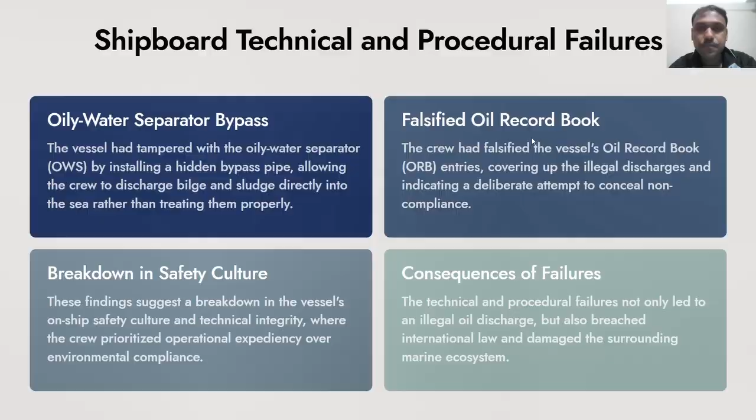The second key issue relates to port side infrastructure constraints. Chittagong Port has extremely limited capacity to handle ship-generated oily waste, with only a single oily waste reception barge capable of serving 1 to 2 ships per day. This is clearly insufficient given the volume of traffic and typical daily bilge production of tankers.

As a result, compliant vessels face long waiting times, congestion, and operational delays. This shortage creates perverse incentives where ships may view illegal discharge as less costly than waiting for proper disposal. In the Eastern Glory case, inadequate port reception facilities directly contributed to the decision to bypass waste management regulations.

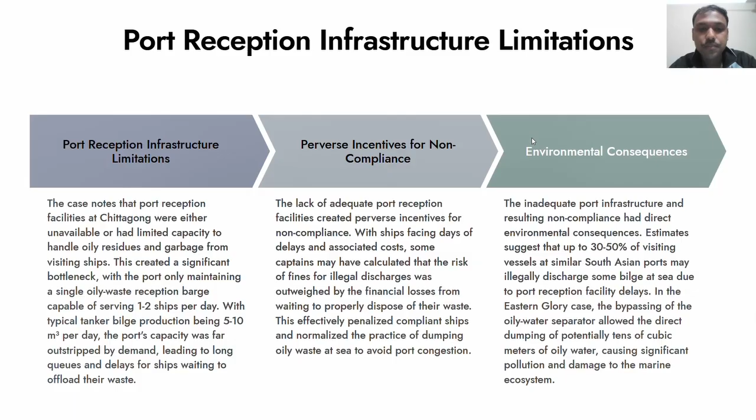Beyond equipment and infrastructure, organizational culture played a decisive role. Crew members indicated that shore-based management pressured them to minimize port time and avoid delays, even if this meant bypassing environmental procedures. This reflects a misalignment of incentives, where financial considerations such as demurrage costs and schedule adherence were prioritized over compliance with MARPOL regulations.

When such pressures are normalized, crews may perceive environmental rules as secondary or optional. The incident therefore illustrates how weak safety culture and economic pressures can systematically erode compliance, even when regulations are well established.

Regulatory and enforcement weakness. The incident also exposed weaknesses in regulatory oversight and enforcement mechanisms. Enforcement appears to have been largely reactive, as the violation was only detected after satellite imagery revealed an oil slick. Routine inspections and oil record book audits failed to identify the bypass earlier.

Furthermore, penalties for violations may be too low to serve as effective deterrents, especially when compared to the financial losses associated with port delays. Fragmented authority among port authorities, shipping departments, and environmental agencies further weakens enforcement. This regulatory environment risks signaling that maritime pollution is a low-risk offense.

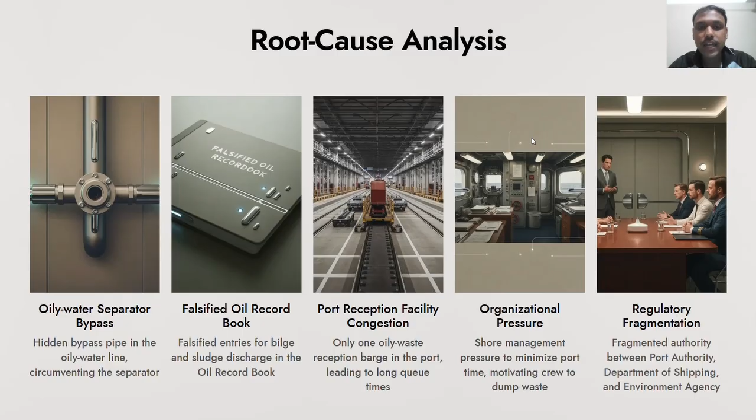Thus, the true root causes lie deeper in systemic issues such as inadequate infrastructure investment, poor alignment of incentives, and fragmented governance. Addressing only the technical failure would be insufficient without tackling these underlying drivers.

Key insights and recommendations. Several key insights emerge from this analysis. First, shipboard equipment and procedures must be strengthened through improved safeguards, transparent documentation, and stricter audits. Second, ports must invest in adequate and functional reception facilities to eliminate congestion and remove incentives for illegal discharge.

Third, organizational incentives must be realigned so that environmental compliance is prioritized over operational speed. Finally, regulatory authorities must strengthen inspections, impose meaningful penalties, and improve interagency coordination to ensure deterrence.

In conclusion, the Eastern Glory incident demonstrates that sustainable maritime operations require a multifaceted approach. Environmental compliance cannot rely solely on shipboard technology or crew discipline. It depends equally on supportive port infrastructure, responsible organizational culture, and effective regulatory enforcement. By addressing these root causes collectively, the maritime industry can move toward a stronger culture of environmental responsibility and prevent similar incidents in the future.

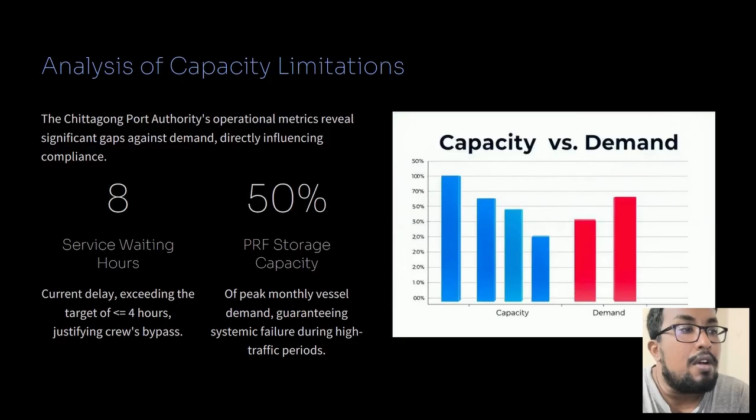Focusing on MARPOL Annex 1, we identified specific issues related to oily waste. The lack of sufficient port reception facilities often led to vessel crews bypassing their oil water separators and using internal piping systems, a measure driven by necessity but leading to law-evading practices. The overall accommodation for oily residues was virtually non-existent, resulting in extreme congestion and severely limited capacity for proper disposal.

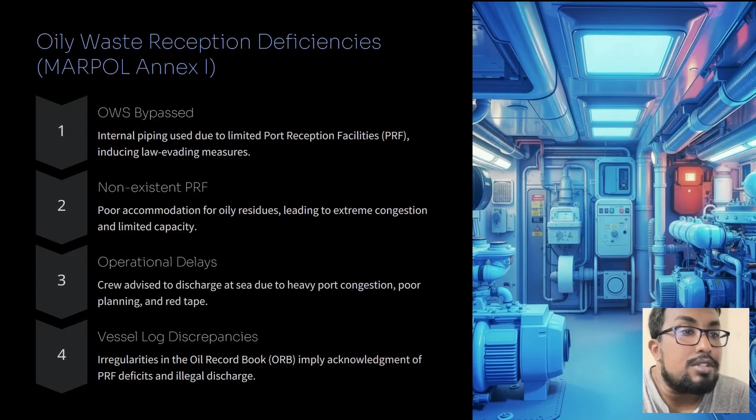This environment created operational delays where crews were implicitly and sometimes explicitly advised to discharge at sea due to heavy port congestion, poor planning, and bureaucratic red tape. Furthermore, irregularities found in the oil record books of vessels strongly implied an acknowledgement of PRF deficits and consequently involvement in illegal discharges.

Similar challenges plagued garbage reception under MARPOL Annex 5. The limited capacity manifested in insufficient bins, a scarcity of collection trucks, and inadequate processing centers to handle the diverse types and volumes of garbage generated by vessels.

These physical limitations were compounded by operational concerns, including extended response times from reception services and general unreliability. Such conditions inevitably tempted crews to illegally discharge excess garbage into the sea, viewing it as the only viable option to avoid costly delays and operational burdens.

The incident involving the MT Eastern Glory serves as a stark illustration of how these insufficient port facilities and operational strains directly contribute to MARPOL Annex 1 and 5 violations. The core problems stem from two areas. First, infrastructural capacity, characterized by a complete lack of redundancy and minuscule capacity at Chittagong Port, leading to a systematic failure under normal operating conditions.

Second, significant operational challenges, including persistent port congestion, the low priority given to waste reception services, and poor coordination among stakeholders collectively exacerbate the issues, creating an environment ripe for non-compliance.

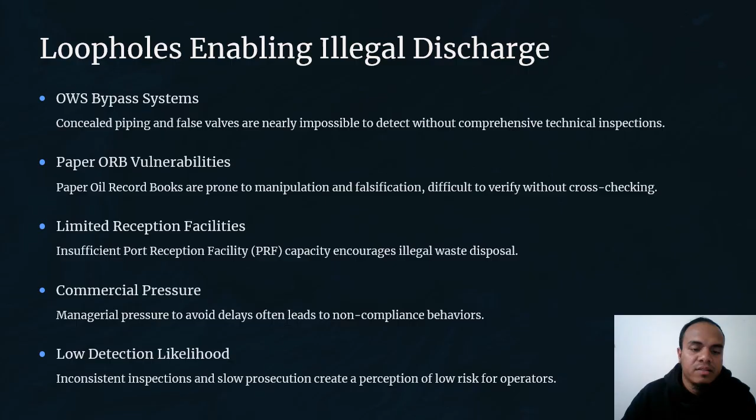To effectively address these challenges, a comprehensive enforcement reform strategy is required. First, port state control capabilities must be strengthened. This includes increasing the number of trained port state control officers and providing specialized training on oily water separator systems, pipeline tracing, and forensic inspection techniques. Second, monitoring systems should be digitalized.

Integrating satellite surveillance, AIS tracking, and electronic oil record books would allow authorities to detect suspicious discharge patterns and reduce reliance on manual inspections. Third, penalty structures need to be reformed. Fines should be proportionate to both the environmental damage and the economic benefit gained from illegal discharge, ensuring that non-compliance is no longer profitable. Fourth, establishing a joint inter-agency task force is essential.

A unified body involving Chittagong Port Authority, Department of Environment, Department of Shipping and Coast Guard would improve accountability, intelligence sharing and rapid response. Finally, transparency and port reception facility access must be improved. Publishing PRF availability and introducing digital waste booking systems would encourage ships to dispose of waste legally and reduce incentives for illegal discharge.

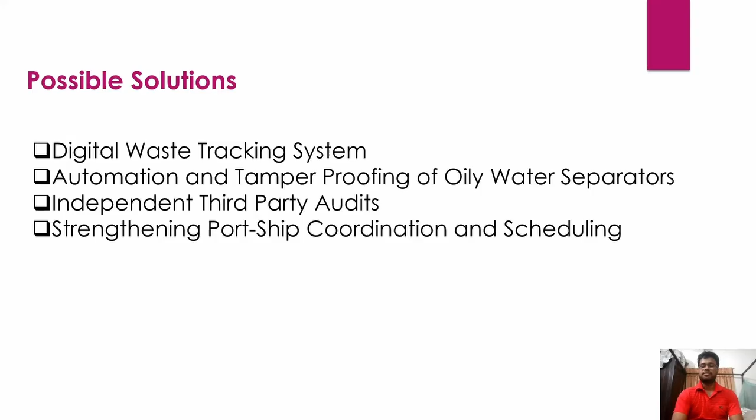First, let me talk about digital waste tracking systems, particularly electronic oil record books or EORBs, combined with digital waste manifests. Traditionally, ships maintain paper-based oil record books, which are easy to manipulate. In several enforcement cases, including the MT Eastern Glory incident, false records were used to hide illegal discharges.

By shifting to electronic ORBs, every step of oil waste management, from generation to disposal, is digitally recorded and time-stamped. When these systems are connected with port reception facility records, authorities can cross-check ship data with port data, making falsification extremely difficult.

Responsibilities in the digital waste tracking system include: ship owners install EORBs and train crews; crews log all waste operations accurately; port authority and PRFs verify and cross-check data; regulators approve systems and enforce compliance.

Advantages include real-time verification, transparent records, data-driven inspections, and better coordination among stakeholders. However, there are challenges such as high initial costs, the need for regulatory support, cybersecurity risks, and difficulties for smaller vessels. Despite these issues, digital tracking significantly raises the cost of non-compliance.

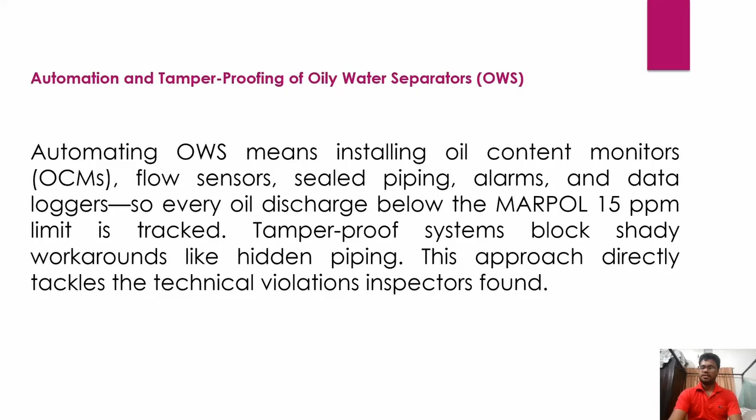Now, if you talk about the responsibilities, we can see the ship owners retrofit and maintain systems. Crew operators operate correctly and report faults. The class societies certify installations, and authorities inspect data and enforce penalties.

The key benefits are strong deterrence, reliable evidence, and improved onboard environmental culture. However, retrofitting older ships is costly. Maintenance failures can occur, and crew members require technical training. Additionally, international standardization across flag states is essential.

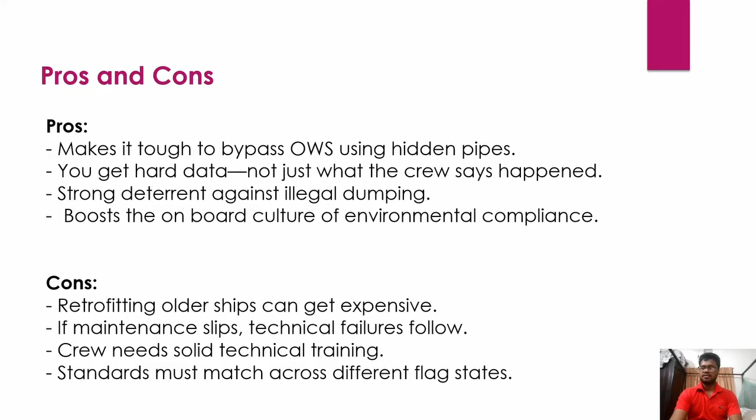Now, the third recommendation is independent third-party audits for both ships and port reception facilities. Routine inspections often suffer from conflicts of interest or predictability. Independent auditors, certified and regulated, bring neutral oversight. These audits assess waste handling procedures, record accuracy, PRF adequacy, compliance with MARPOL and national regulations, and others.

The responsibilities are divided as follows. Ship owners and shipping companies facilitate audits and promptly address identified non-compliances. CPA, or the Chittagong Port Authority, mandates and supports independent audits of port reception facilities. Independent audit organizations independently assess compliance with MARPOL and national requirements. And finally, regulatory authorities enforce regulations using audit findings and oversee auditor credibility.

Advantages include higher accountability, detection of repeated non-compliance patterns, continuous improvement, and improved international reputation of the port. On the downside, audits increase operational cost, poorly regulated auditors may create conflicts of interest, and excessive inspections can lead to audit fatigue. Still, when properly regulated, audits act as a powerful compliance mechanism.

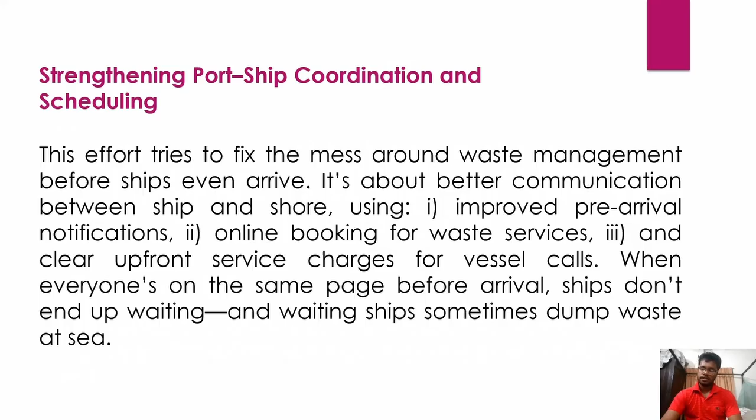Now, the responsibilities include: ship owners and shipmasters provide accurate pre-arrival waste information and follow disposal routes. CPA coordinates waste services and enforces notification requirements. PRF operators ensure capacity and timely waste collection. Regulatory authorities monitor compliance and enforce penalties.

The benefits are reduced waiting times, less incentive for illegal dumping, smoother port operations, and improved trust. However, challenges include institutional resistance, dependency on digital infrastructure, and limitations of PRF capacity.

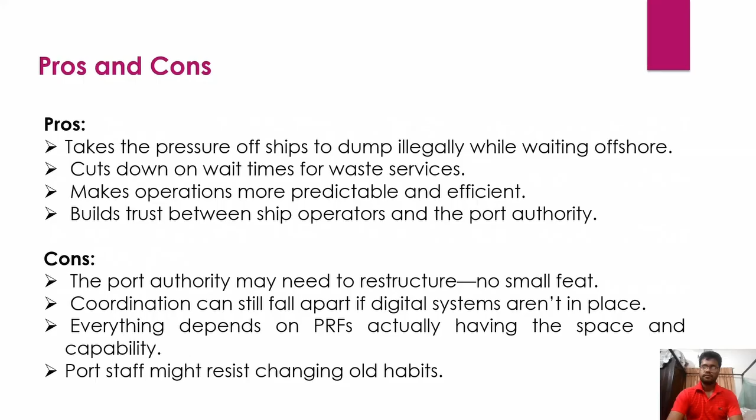To conclude, preventing MARPOL Annex 1 violations at Chittagong Port requires an integrated approach. No single solution is sufficient on its own, but when digital tracking, technical safeguards, independent oversight, and effective coordination are implemented together, they create a strong and sustainable compliance framework.

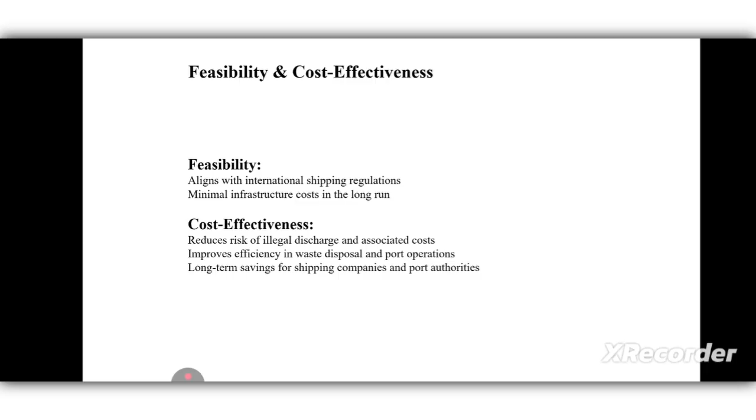In conclusion, the oil record book system greatly improves environmental protection and MARPOL compliance. It is scalable, efficient, and suitable for modern maritime operations. Its implementation can enhance Chittagong Port's international reputation and promote sustainable shipping practices.

The oil record book is the best solution because it addresses both technical and documentation problems and aligns with MARPOL Annex 1 and Annex 5 regulations.

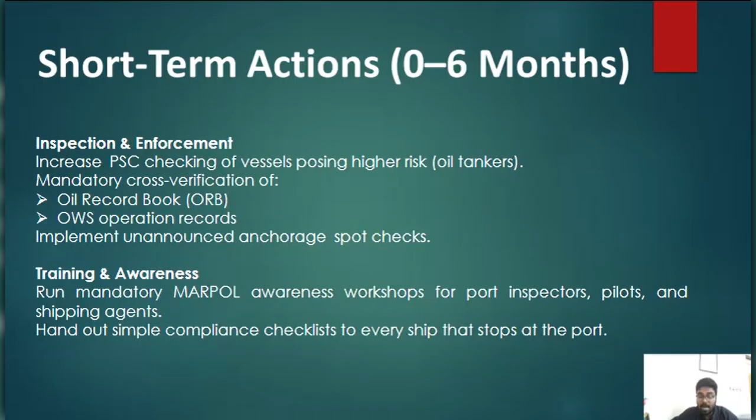In the first stage, a MARPOL task force will be formed with the Port Authority, Department of Shipping, Department of Environment, Coast Guard, and Seaport Control Board. Ship inspection will be increased, especially for oil tankers. Important documents like the oil record book will be checked, and surprise inspections will be done at anchor areas.

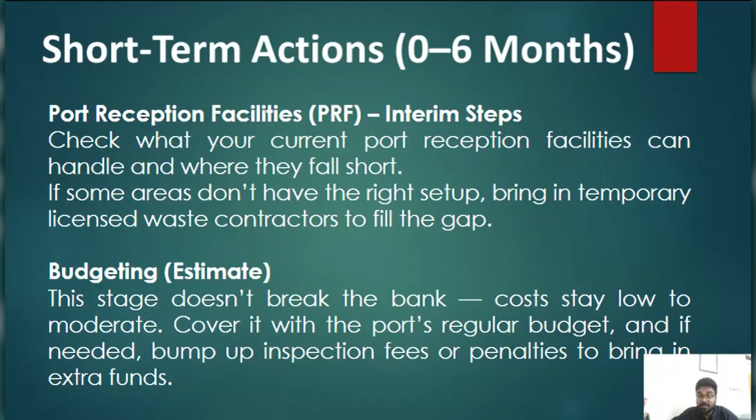Training programs will be arranged to raise awareness among port officials and shipping agents. Existing waste reception facilities will be checked and temporary waste contractors will be used if needed.

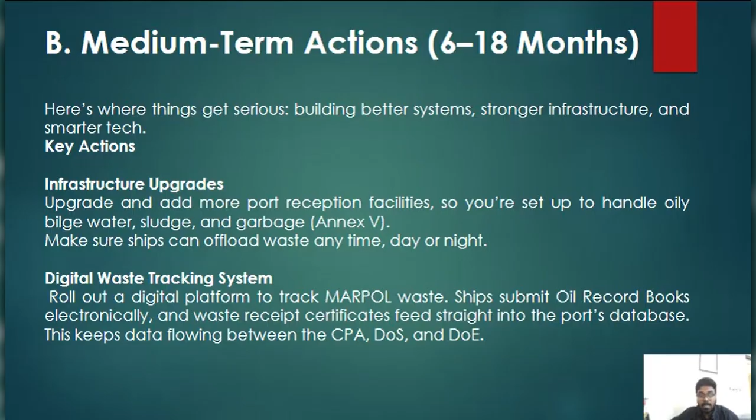In the next stage, port reception facilities will be improved so ships can safely dispose of oily waste and garbage at any time. A digital waste tracking system will be introduced to record waste disposal and ship data. Training will be provided to inspectors and port staff, and private waste companies will be monitored regularly.

In the final stage, national laws will be updated to match MARPOL rules. Repeat offenders will receive stronger penalties. Modern technology like satellite monitoring and AIS tracking will be used to detect illegal waste discharge. A green port and green shipping program will reward ships that follow environmental rules.

In conclusion, this plan will help reduce marine pollution, improve cooperation between agencies, and increase the international reputation of Chittagong Port. Thank you for your attention.

Assalamu alaikum everyone. This is Maisha Salwa Haq presenting the case study context and the key issues in this case study. This case study mainly focuses on the MT Eastern Glory incident at Chittagong Port in June 2024. The vessel illegally discharged oily wastewater within port limits. Investigations confirmed that the oily water separator was deliberately bypassed and oil record book entries were falsified, resulting in a clear violation of MARPOL Annex 1.